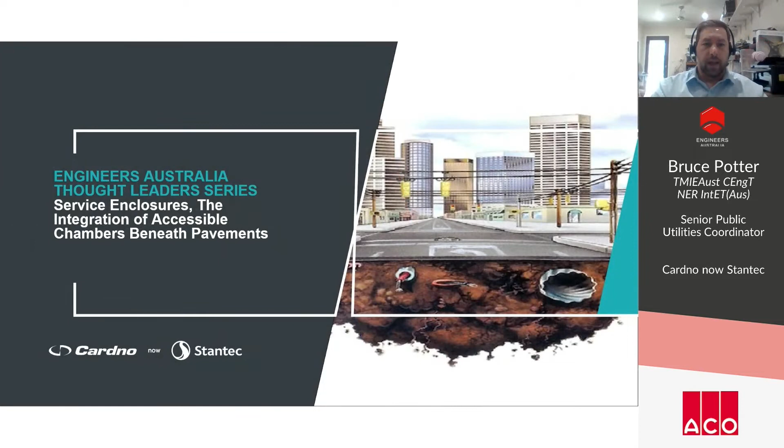Today we're discussing service enclosures. What is a service enclosure? How do we identify where they are, the types of service enclosures, the applications for service enclosures, and some takeaways that you can take away with you.

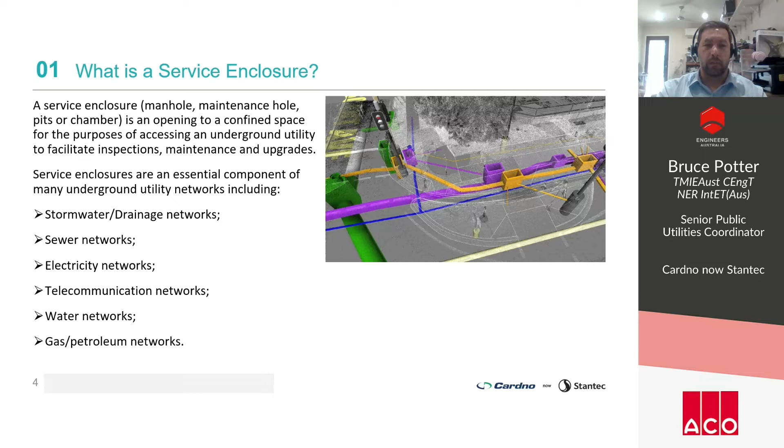So what is a service enclosure and how do we identify where they are? A service enclosure, or a manhole, maintenance hole, pit or chamber, is an opening to a confined space for the purposes of accessing an underground utility to facilitate inspections, maintenance and upgrades. Service enclosures are an essential component of many underground utility networks, including drainage and stormwater networks, sewer networks, electricity networks, telecommunication networks, water networks, gas and petroleum networks.

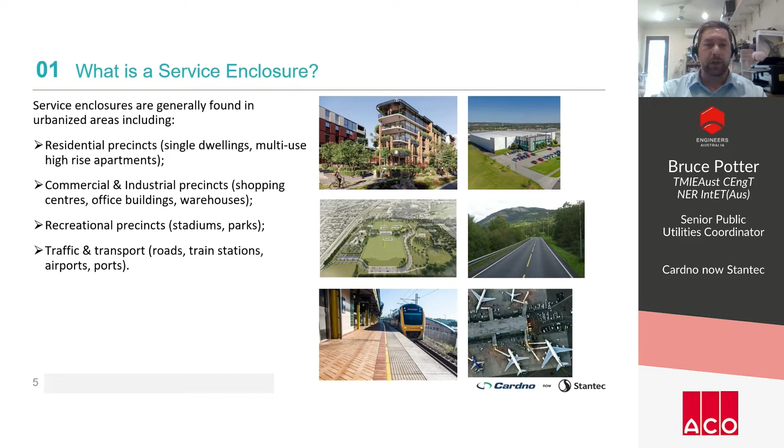Service enclosures are generally found in urbanised areas, including residential precincts, so any subdivisions where you have single and multi-high-rise building apartments, commercial industrial precincts, including shopping centres, shopping malls, office buildings and warehouses, recreational precincts, including stadiums and parks, traffic and transport, including roads, train stations, airports and ports.

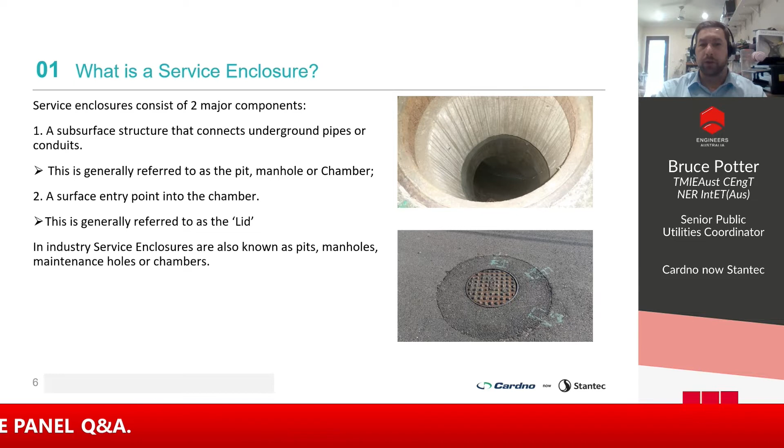Service enclosures consist of two major components: a subsurface structure that connects the underground pipes or conduits, generally referred to as the pit, manhole or chamber, and a surface entry point to the chamber, generally referred to as the lid. In industry, service enclosures are known as pits, manholes, maintenance holes or chambers.

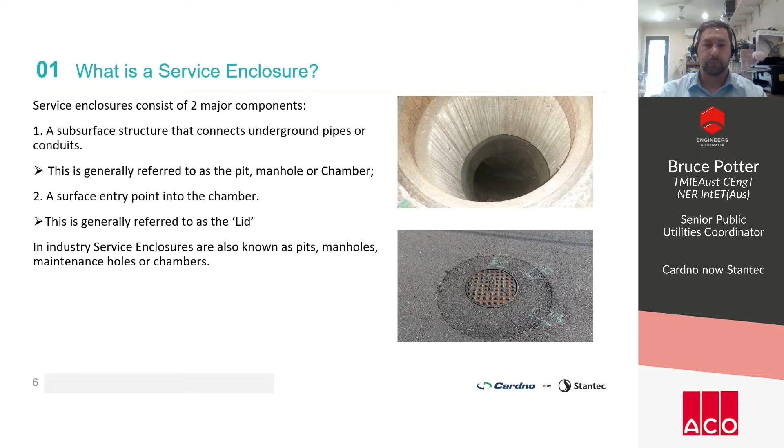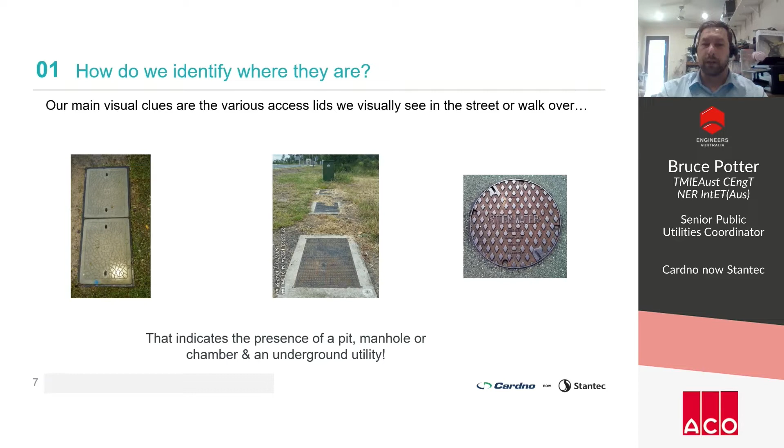So how do I identify where they are? Our main visual clues are the access lids we visually walk over or visually see. On the left-hand side, we have a telecommunications pit that you'd normally see in a residential area. The picture in the middle is a telecommunications pit that would contain large conduits and cables. And the picture on the right is a stormwater manhole that's in the road. This would indicate the presence of an underground utility with the pit lid that you see.

The first step to obtain information about a public utility is to lodge a Before You Dig Australia request. This used to be called Dial Before You Dig Australia, and they've now changed their name to Before You Dig Australia. Or if you are working in an area where there's private assets, such as a private airport, you'd need to contact the relevant organisation.

Before You Dig Australia information is considered Quality D of AS 5488.1 2022 and should only be used as a guide for presence of underground utility. Other sources you can obtain information from may include topographic surveys or via utility locators, which might actually provide photo maps or their own utility surveys.

In engineering design, the topographic survey would normally contain the lids of the existing utilities. These would be labelled to the type of utility asset, such as drainage or sewer or electricity and communications, and assigning this to Quality Level C of AS 5488.1 2022 for a surface feature. This indicates that there is a presence of an underground pit, manhole or chamber with pipes and conduits connected when combined with the Quality Level D information from the Dial Before You Dig or Before You Dig Australia search.

You can obtain more information by opening the pit lid, and that's usually done by the asset owner or an accredited utility locator.

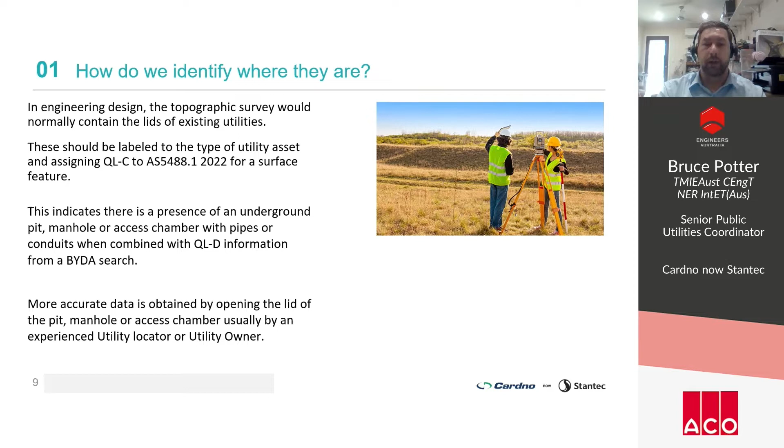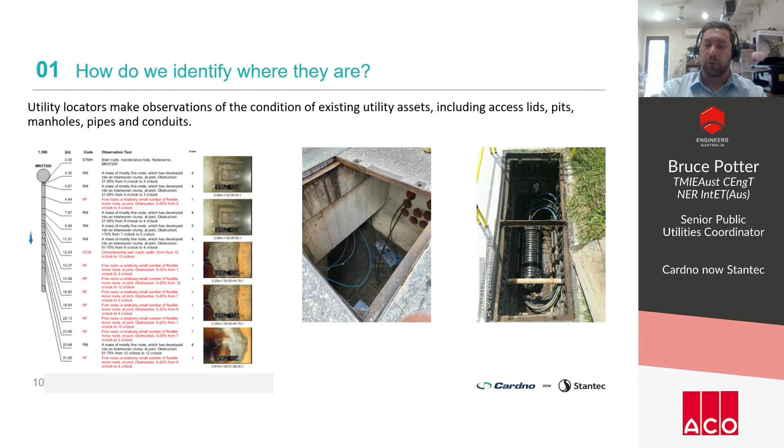Next, we talk about manholes. Manholes are generally associated with stormwater and sewer assets. They are considered non-trafficable, but also trafficable. In the case of non-trafficable, they can be found in footpaths and sidewalk pavements, and pedestrian-centric areas such as shopping malls and shopping centres. The manhole is usually constructed of reinforced concrete, and the lids are usually cast iron or concrete infilled lids, which can be textured to match their surrounding aesthetics. The picture on the right shows an existing sewer manhole lid in an allotment.

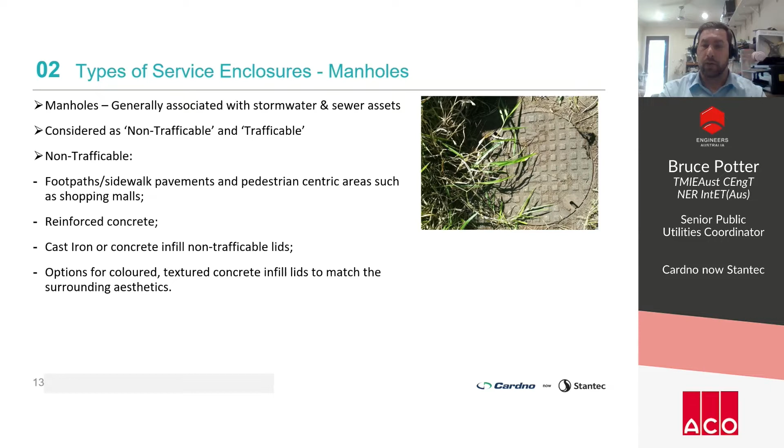Now we move on to manholes in trafficable situations, which are generally found in flexible and rigid pavements such as cycleways, car parks, roads, and airport aprons. Again, they are generally constructed from reinforced concrete, and the lids this time are cast iron or concrete infill lids, but they are trafficable type, so much more heavy duty. There are also options for bolted down lids.

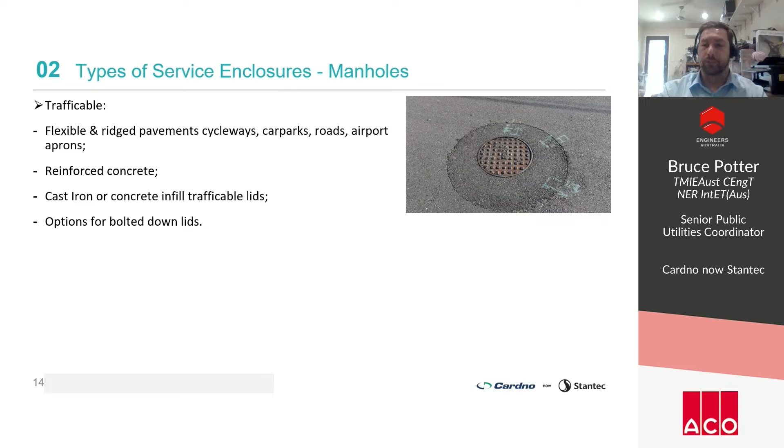Now we move on to chambers. Chambers are generally associated with any asset that contains a surface opening to a larger confined space area containing larger pipes or multiple groups of conduits. They can be considered trafficable or non-trafficable. In the case of non-trafficable, they can be found in footpaths and sidewalk pavements, and pedestrian-centric areas such as shopping malls and shopping centres. They're made of reinforced concrete, and their lids can be cast iron or concrete infill lids. Similar to pits, their lids can be textured to match the surrounding aesthetics. The picture on the top right shows inside of a pit inside a sidewalk in the CBD area, and the picture at the bottom shows a cast iron lid in a footpath area.

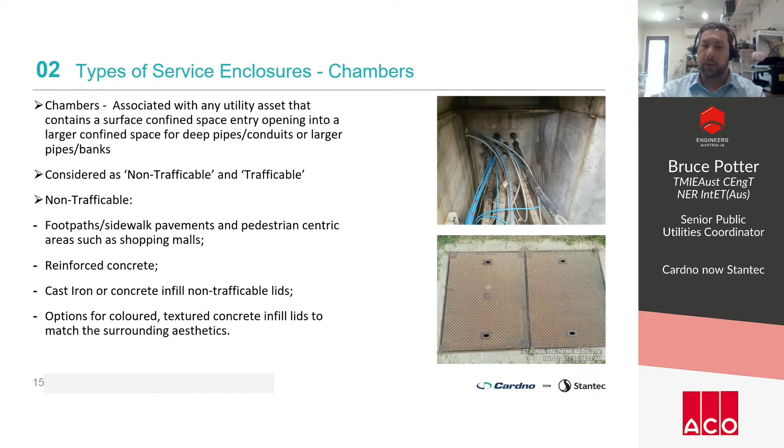Now we move on to chambers in trafficable areas. Again, these are in flexible and rigid pavements such as cycleways, car parks, roads, and airport aprons. They're made of reinforced concrete, and the lids can be cast iron or concrete infill trafficable lids. Again, they can have options for bolt down lids.

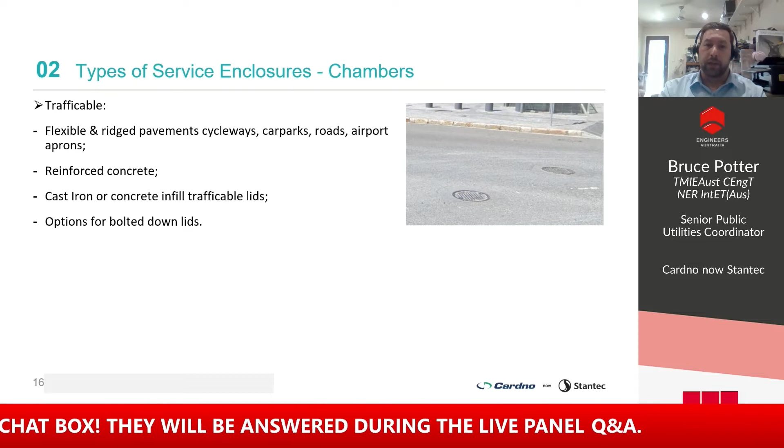Now we move on to the application for service enclosures. Pits, manholes and chambers are in almost every project, including Greenfield projects, defined as any project that lacks constraints by prior works, or Brownfield projects, defined as projects that contain prior works that may impact the design you're currently working on. Both Greenfield and Brownfield projects may contain non-trafficable and trafficable access lids, pits and manholes that require different factors to be considered depending on the applications you are using them for.

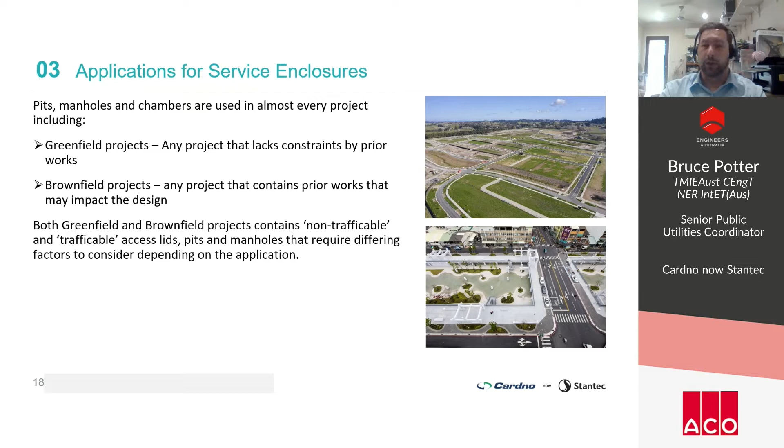So in the case of Greenfield projects, the overall considerations here is the risks are generally lower than Brownfield projects. The design constraints are generally limited to the project coordination and constructability considerations within the project itself. Safety and design risks are generally lower and more manageable. And the durability and maintenance of pits, manholes and access chambers are lower because they are considered as new.

So as you can see there in the picture on the right-hand side, we've got a brand new urban development site there, and contained within that, you'll have your stock standard pits, manholes and chambers associated with that project.

So now we talk about Greenfield projects, non-trafficable. So what to consider for pits, manholes and chambers? Well, they're primarily based on standard corridor widths and verges in road reserves and considered as reticulation. Pits, manholes and chambers and their associated pipes and conduits are generally designed to standard verge depths. The loads on the pits, manholes and chamber depths are considered as light duty under footpath and pedestrian-centric areas.

As discussed before, they are generally unreinforced concrete or hard plastic. And the safety in design considerations for constructability, access and maintenance are considered as standard in line with operations and maintenance. As you can see, the picture on the right-hand side there shows a typical scenario in a verge situation with a reticulated telecommunications asset.

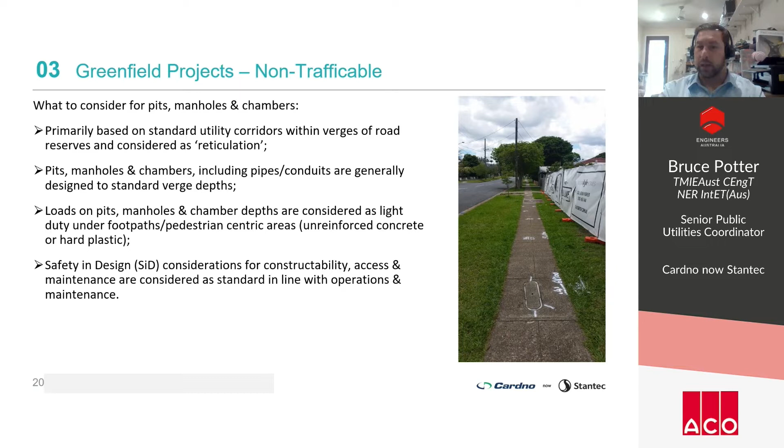So now we move on to Greenfield projects, trafficable. So what to consider for pits, manholes and chambers? Well, they're primarily based on reticulation, but they can also contain trunk utility assets or assets that are unable to be designed in the standard verge corridors. So you may have a situation where you have high voltage electricity that does not fit in the verge that needs to go under the road pavement.

Pits, manholes and chambers, including pipes and their associated conduits, are designed deeper to accommodate the road pavement design. The loads on the pits, manholes and chamber structures are considered as heavy duty, and as discussed before, they are made primarily of reinforced concrete. The loads on the pits, manholes or chamber lids are considered as heavy duty, and again, cast iron is generally what they're made of, or concrete infill lids. The access lids are considered as heavy duty.

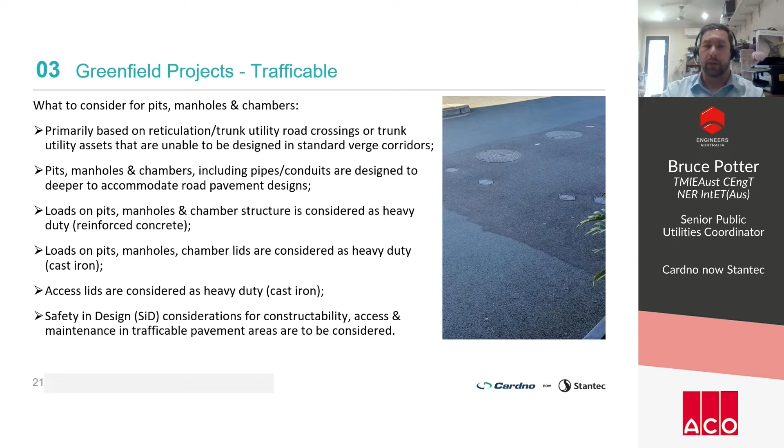Safety in design considerations for constructability and access in trafficable areas are to be considered. So when we're placing these sort of things in the design world, we should be placing them as close as possible to the existing curb line, where we can actually think about maintenance in roads, where we can shut off the road without affecting multiple lanes.

So now we move on to Brownfield projects. So overall considerations, the risks are generally higher due to constraints that may affect the designs. So there's lots of moving parts that sometimes you're aware of and sometimes you're unaware of, or you're obtaining more information about them. It relies on the collation of existing utility data. So in this particular case, you would have to map the existing utilities that are on site to make sure that you are fully aware of what's currently underground.

You would need to identify the existing pits, manholes and chambers to be modified, being raised or lowered against the design levels. So this means that you might have an existing telecommunications pit that may need to be raised to the final surface levels. The pits, manholes and chambers need to be structurally condition assessed to determine if they are fit for purpose. So some of these pits that you may see may actually be degraded. So you will need to actually pull out the entire pit and replace it with a brand new pit. You'll obviously need to obtain approvals from the asset owners.

Safety in design risks are generally higher and may require inputs from multiple sources. And the durability and maintenance risks of pits, manholes and chambers are generally higher because we're generally retrofitting, unless of course we are putting in a brand new asset, in which case it is not as high as retrofitting.

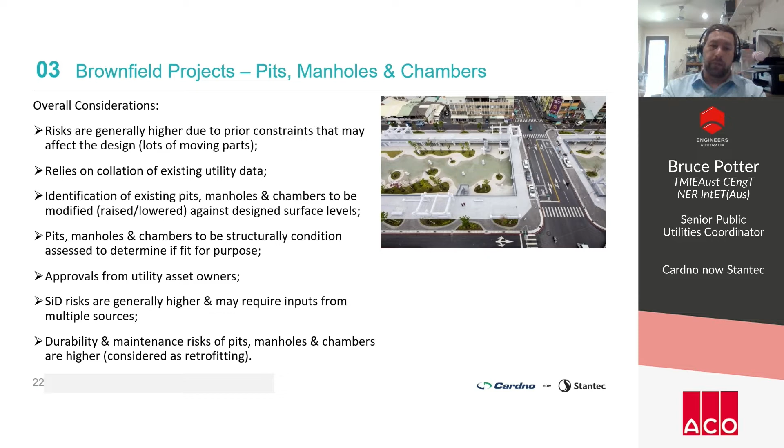So Brownfield projects in a non-trafficable situation. So what to consider for pits, manholes and chambers? Well, they generally adopt the standard corridor widths and depths under road reserves where practical, but are based upon the utility data and new designs. So if you have mapped the existing utility data, and you have a design, you need to understand where you can actually place these new assets.

Structural condition assessment of existing pits, manholes or chambers identified as maintained and modified or raised or lowered to new design levels. The loads on the pits, manholes and chambers are considered as light duty under footpaths and pedestrian-centric areas, and again, unreinforced concrete or hard plastic. Access lids are considered as light duty, so concrete infill or hard plastic.

So now we move on to brownfield projects in a trafficable situation. So what to consider for pits, manholes and chambers? Well, they're primarily based on reticulation and trunk road crossings or trunk utility assets designed deeper under flexible and rigid pavements based upon existing utility data and new designs. So what that means is that unlike a greenfield project, you will need to look at what existing constraints you have with the existing underground utility data and whatever it is that the design is doing.

We'll need to do a structural condition assessment of the existing pit, manhole or chamber, identified as to be maintained and modified, so you may need to raise it or lower it to the new design levels. The loads on the pits, manholes and structure are considered as heavy duty because they're made of reinforced concrete under flexible and rigid pavements based upon existing utility data and new designs. And the access lids are considered as heavy duty cast iron.

Safety in design considerations for constructability, maintenance and trafficable pavement areas are considered as a case-by-case scenario. And again, similar to what happens in greenfield sites when we have trafficable situations, we need to consider the accessibility of these assets, so whoever's maintaining them doesn't need to take out many lanes of traffic in a highway situation, where they're contained in one single lane where we can actually take out a lane and not adversely affect other traffic.

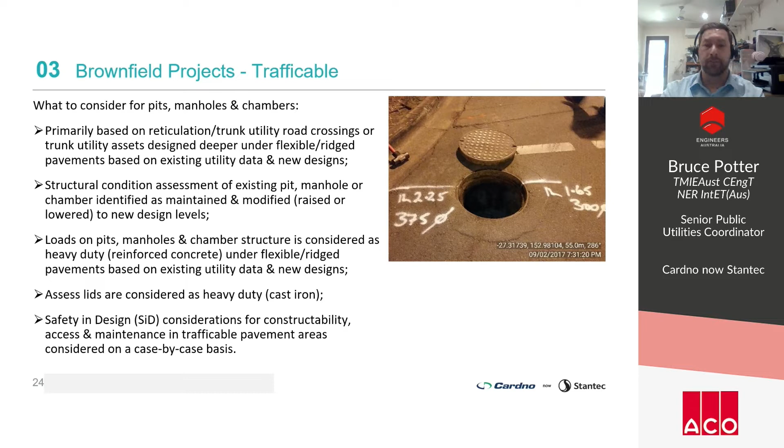So now we come along to the takeaways of all this presentation. So what you should take away from this presentation is the pits, manholes and chambers are absolutely everywhere. We continue to design them in every project that we work on, but there are also many of these assets that are currently existing. Some of them are in good condition, some of them are in not so good condition, and some of them are somewhere in between.

We need to also understand the differences between the pits, manholes and chambers for the various types of utilities and their applications, and the differences between non-trafficable and trafficable pits, manholes and chambers on the various types of pavements. So when you are specifying something for a footpath pavement, or something for a flexible road pavement, or something maybe in an airport's apron, they're all going to have different scenarios to consider.

Pits, manholes and chambers in greenfield projects rely on correct specification depending on the application, and they're basically considered as new assets. The pits, manholes and chambers in brownfield projects rely on condition assessments and are considered as retrofitting. And of course, that's all based upon existing data that we collect.

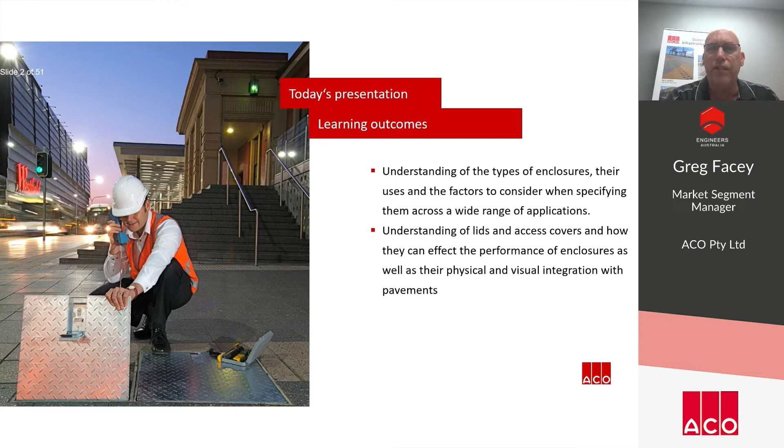Cover and frame systems also provide secure protection to cable enclosures and enable decorative floor finishes to be maintained with minimal interference. Today, we'll discuss the key requirements when selecting service enclosures, cover and frame systems, as it's important to understand the correct enclosure for the application. So in today's presentation, we're looking to achieve an understanding of the types of enclosures, their uses, the factors to consider when specifying them across a wide range of applications, and also an understanding of the lids and access covers and how they can affect the performance of the enclosures as well as their physical and visual integration with the pavements.

Because understanding this is really important in terms of cover durability and pavement life, because incorrect product selection, poor product or incorrect assessment of the site conditions can lead to failure of the system, and failures occur for a wide variety of reasons. However, understanding all the aspects of the enclosure system is critical to long-term performance.

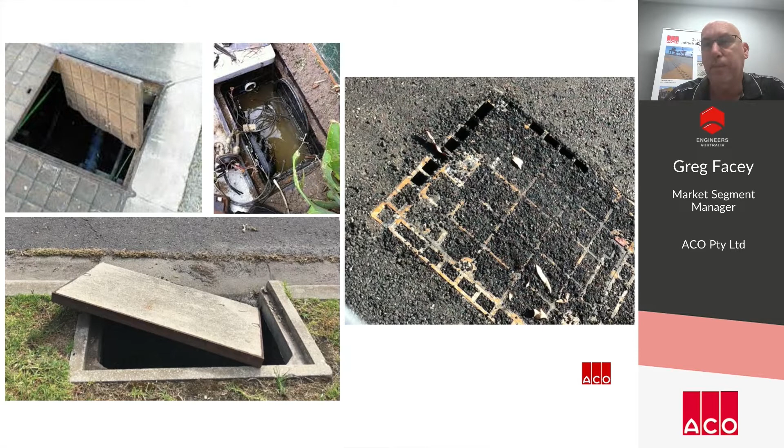So if we consider the types of cable service enclosures, cable pits are positioned on cable routes to provide branching or bending points or to allow access for jointing and maintenance. Common cables routed through cable pits are data communication or fibre optic cables, and also low voltage electrical wiring. Just remember that generally higher voltage cables typically go overhead or extremely deep underground.

In contrast to this, surface cable ducting systems become the cable route themselves and allow for low voltage cables and other utilities to be laid directly along the trafficable pavement. They can be continually accessed through removable covers, and the structure enclosing the services is typically continuous. These are often in the form of either precast sections with smaller widths with covers up to 300 mm, or can also be cast in situ systems for wider width requirements.

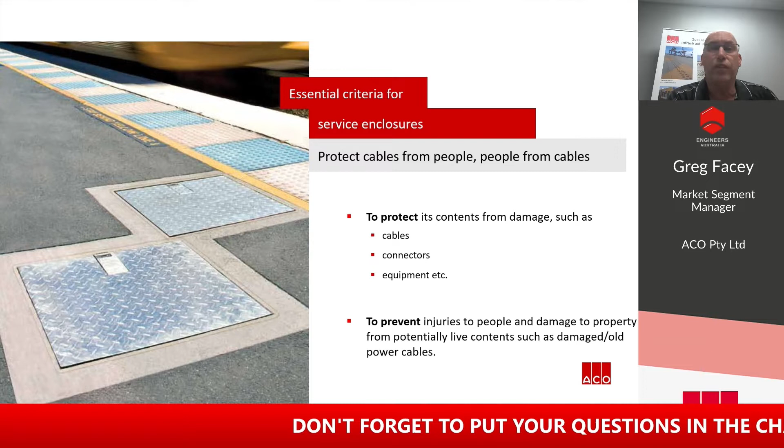A cable enclosure is designed to protect its contents, so its cables, connectors and equipment, against external influences. The structure also needs to act as a shield to prevent its potentially live contents from causing damage or injury to passers-by.

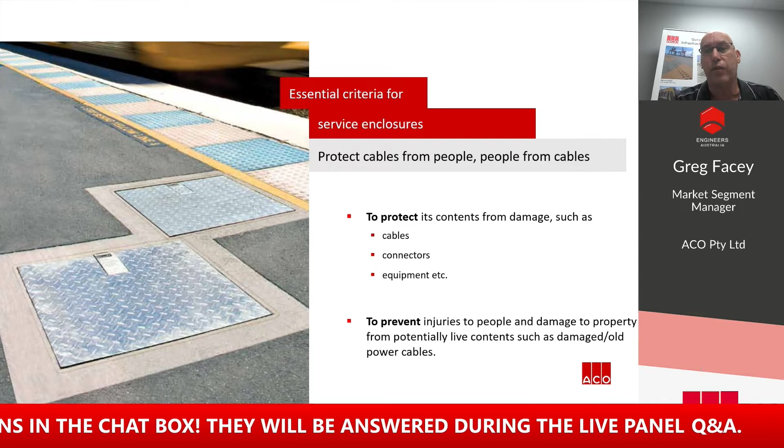Cable pits are commonly positioned where the cable run is required to change direction, and this is because bends in underground conduits are undesirable. Cable pits are also used for drawing, or hauling is another term, of the cables, also called pulling boxes, and they are used for pulling cables into the enclosure using pulling equipment or looping or feeding it into the next enclosure along the length of the cabling system. In each drawing pit, conduits are generally aligned with the opposite walls at the same elevation. AS 3084 stipulates strict requirements for cable pulling so cables aren't damaged during these operations.

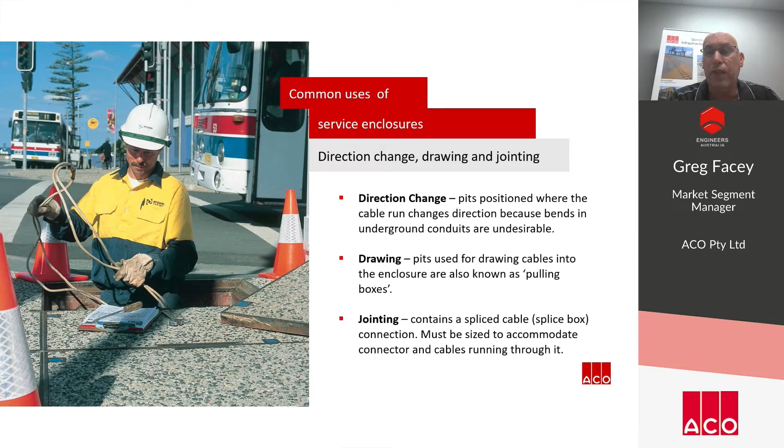Jointing pits, which are also called splice boxes, are intended for enclosing a spliced cable connection. These pits contain waterproof cable joints and are generally placed along straight sections of the cable route. These cable pits must be correctly sized to accommodate the size of the connector and also the cables running through it.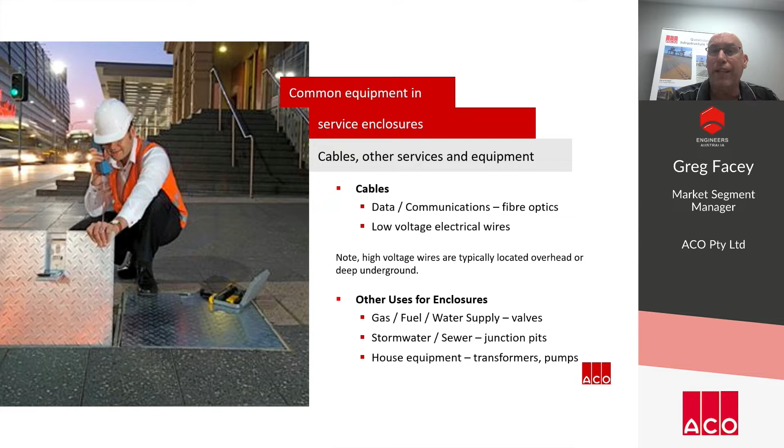Some common equipment in service enclosures are cables, so data and communication, fibre optics, low voltage electrical wires, and they're used not just for electrical cabling, but also for other uses, as in gas, fuel and water supply and valves, housing stormwater and sewer junction pits, and also housing equipment, i.e. transformers and pumps. Locating services below ground enhances the appearance and also improves access by service personnel.

So there's four key factors that need to be considered when selecting service enclosure systems. Choosing the right enclosure for the right application, particularly during the planning and design stage, is essential to prevent both problems and product failures in the future. We need to consider the size of the enclosure to ensure the utility asset is housed appropriately, the location and all intended loads in each of its locations.

The type of traffic loading will also play a significant part in selecting the correct product. For example, a light vehicle versus a heavy vehicle or forklifts will exert different loads on the cable enclosure. Durability of the materials, both of the enclosure and the cover, and ground conditions and location also play a significant part in the durability of the enclosure. We need to consider the safety and security of the enclosure, what level of security is required, and also the user and public safety.

Considering the site and user requirements with the installation and maintenance of the enclosure, how will this enclosure be installed? Ultimately, a contractor will pick up the drawings and need to carry out the installation. So it needs to be easy to install, or is it a time-consuming enclosure which is going to add more cost? So choosing the correct enclosure can have a direct impact on costs. Ultimately, the asset holder undertakes the maintenance in most cases. So how is the enclosure or the system going to be maintained in an efficient and safe manner?

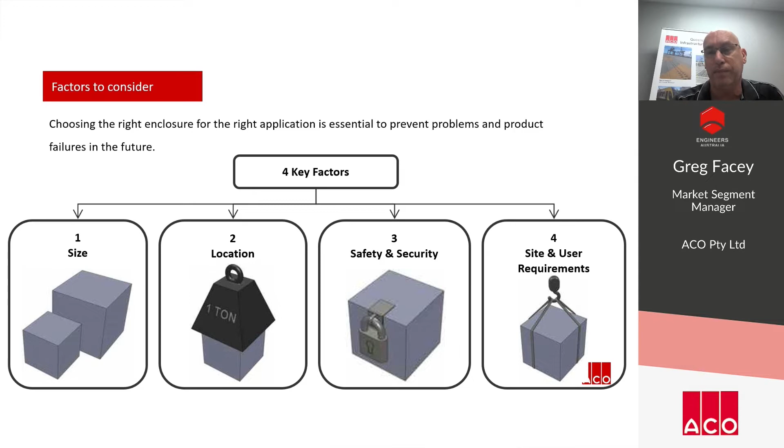So choosing the correct enclosure size will depend on the following: the purpose of the enclosure, the minimum bending radius of the cables, and refer to the manufacturer's cable recommendation. Minimum depth to cables, so you need to refer to those standards, and is segregation of the cables required? For example, it may be low voltage electrical or maybe communications. And will the pit be used for storage? Most cable pits are narrower at the base for ease of manufacturing, so you need to make sure you consider the clear opening of the cable enclosure and the pit, and also its minimum dimensions.

We also need to consider the location and particularly the traffic and loading, because there is no Australian standard that applies to service pits. So we need to consider the anticipated traffic scenario over each of the enclosures. So is there no anticipated traffic? Is there some accidental, or will it be deliberately traversed by vehicles? The wheel type and the loadings during the construction and during the service.

Often we've seen pits that may be utilised in a light duty application, but have been traversed by trucks and vehicles during the construction phase, which damages the pit. So all those phases during the construction phase need to be considered, and also importantly, during its service life. A single cable route can pass through a number of different environments, and every service pit along the cable route may be exposed to different scenarios.

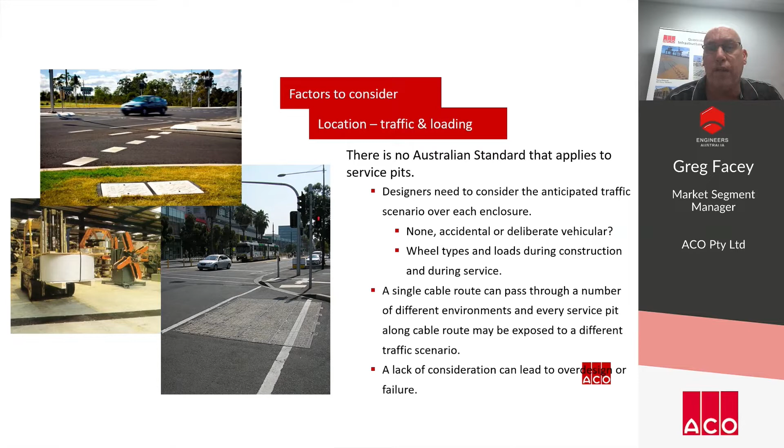So what they're saying is in one location on the cable route, it might only be a light duty application because there's no vehicles traversing it, but that may not be the case throughout the entirety of the cable run. So we don't want to be specifying the covers or the pit for light duty applications when we know it's going to be traversed further down the cable route with trucks. Alternatively, we don't want everything to be extra heavy duty when it's not going to be traversed necessarily, because that's adding more cost. And a lack of consideration can lead to over-design, causing more cost, or can also lead to failure.

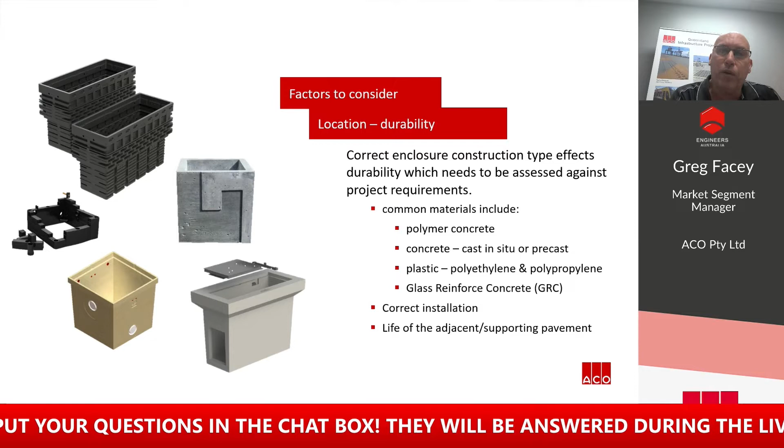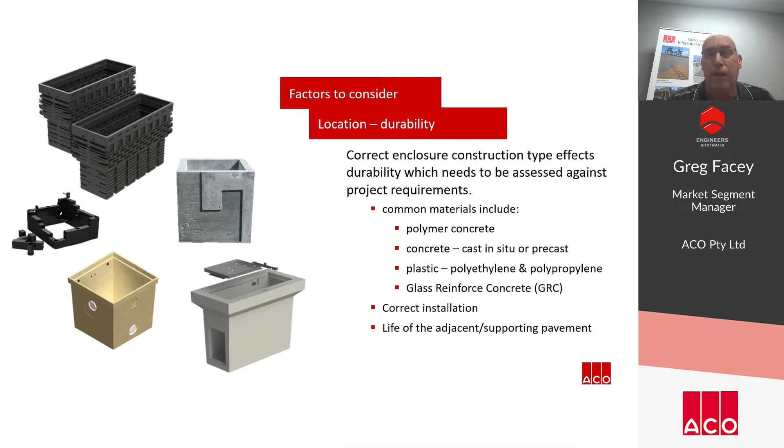The correct enclosure construction type affects the durability, which needs to be assessed during the project against the project requirements. Some common materials for the cable enclosure are polymer concrete; concrete, cast in situ or precast, so essentially a Portland sand and cement with reinforcing; plastic, in the form of either polypropylene or polyethylene; and GRC, or glass reinforced concrete. We also need to consider the correct installation of the pit. So the pit might be fit for purpose, but it's really important that it's installed correctly. And we also need to consider the life of the adjacent and supporting pavement, which can have a direct impact on the cable enclosure itself.

So if we look at some of the different materials and how they perform, you can see here briefly, polymer concrete has a lot of advantages as a construction material on surface, and certainly for a cable enclosure in the form of a pit. Lightweight, low porosity, excellent insulator, excellent chemical resistance, non-flammable, high resistance to weathering, and low coefficient of expansion and contraction compared to that with plastic.

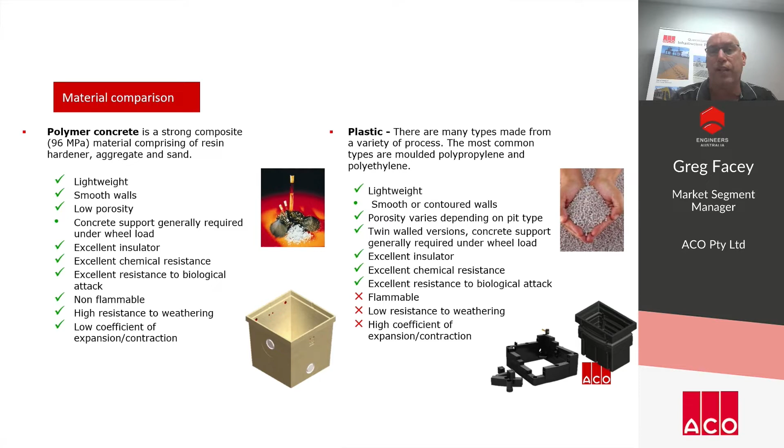And plastic does have advantages: very light, easy to use, easy to create penetrations. There have been some advancements in the industry where typically plastic pits were always what we would call a light-duty single-walled pit. However, there are other pits available now in the form of a twin wall, which can be utilised in heavier duty applications. They are an excellent insulator and have high chemical resistance, but they are flammable. They do have low resistance to weathering, and certainly single wall pits have a high coefficient of expansion and contraction, which means that the actual material can move in and out with different levels of heat during the day.

If we look also at concrete and GRC, one of the main things with concrete is we know it's heavy, so does it need lifting equipment to move it around? It does have moderately smooth walls and average porosity. It does require steel reinforcing to support it, but generally not required under a wheel load. It does have poor chemical resistance and poor resistance to biological attacks, but it does have a lower coefficient of expansion and contraction.

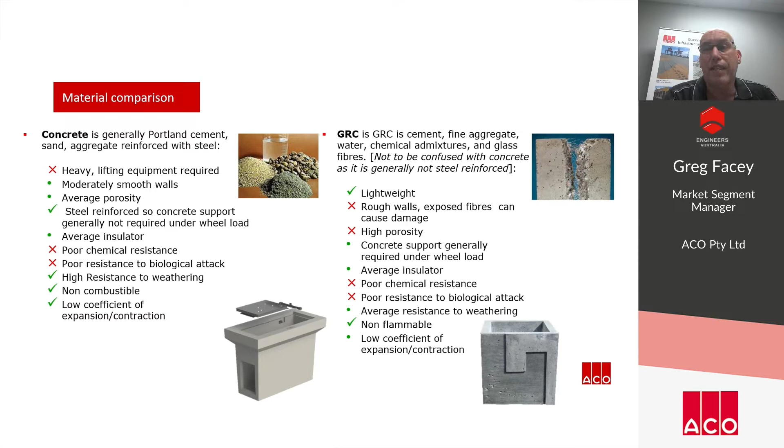Look, GRC, if you're not familiar with GRC, it's a fine aggregate of water and chemical admixtures and glass fibres, so not to be confused with concrete because it's generally not reinforced. It does have an advantage that it's lightweight, but it does have rough walls, which is a disadvantage. It does have high porosity, which is a disadvantage, poor chemical resistance and poor resistance to biological attacks. It is non-flammable, but it is worth noting, particularly with GRC in aggressive environments, it is prone to deterioration, particularly with alkaline soils. So therefore, GRC pits require regular maintenance and in some cases are susceptible to early failure.

And adverse ground conditions may require an increase in these dimensions of the pit and or the addition of reinforcement. And if in doubt, seek engineering advice, because soils can apply lateral pressure on the structures just in the form of its own weight and any surface live loads adjacent to it. And we also need to consider any expansive soils and their properties. And as I mentioned, they can result in lateral earth pressure exerted on the pit wall itself and can lead to early failure.

The location of where the service enclosure is going to be installed is paramount, and understanding what pits are suitable for what application is also really important. So in a landscape environment, light duty loading on a pit structure allows the use of a flexible pit. So we're talking about a single walled, or could be a twin walled plastic pit in this application, but generally single walled. Materials range from fiberglass, so resin and glass mat structure pits, or plastic in the form of rotational or injection moulding. And again, the advantage is they're light, robust and easy to use.

If we move on to and consider solid pavements, so these are pavements subject to vehicular and pedestrian traffic, a rigid pit is recommended. So a rigid pit in the form of either a concrete pit or a polymer concrete pit, so non-flexible walls. And these are in the form, as I said, FRC, so either in a precast fibre reinforced product or Portland cement concrete with steel reinforcement. Can also be cast in situ, so these are boxed up and poured on site, and polymer concrete in the form of precast resin composite material. The advantages, they're strong, rigid and they're versatile.

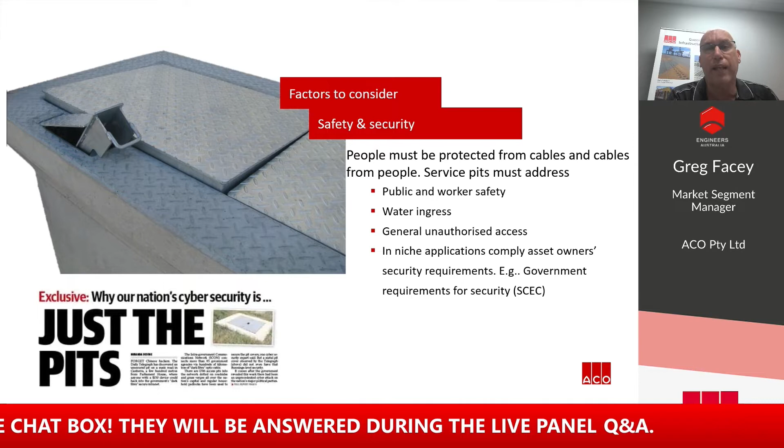And we need to consider the safety and security requirements of the enclosure, because we see heavier security forces in our daily lives and events, and it's not hard to notice the sharp increase in supervision as we go about our daily lives. And sadly, some of the destruction stemming from divisive political, religious and ideological beliefs continues to tick over in the world, unfortunately. But now more than ever, the importance of national security to keep our country as safe and as secure as possible has never been more prevalent. Why do we need to protect ourselves? We need to withstand the disruptions to ensure the safety and well-being of all our residents.

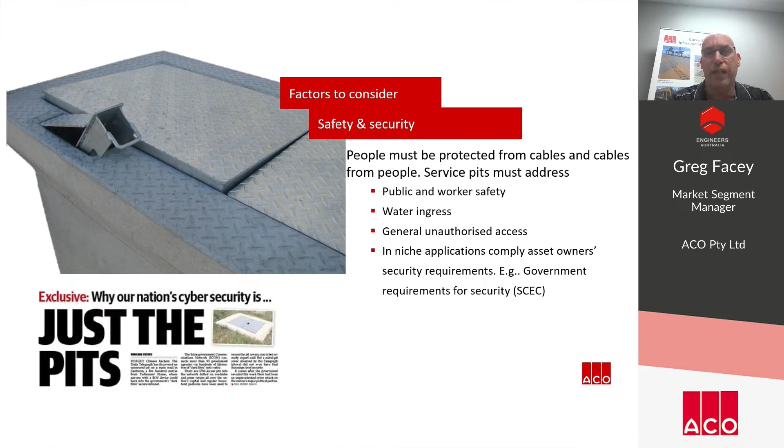We seek, as asset holders and designers, to secure our cyber security systems, and also there are processes in place to protect our national data. To reduce the risk, we adopt a critical resilience approach to the integrity and reliability of our cable infrastructure in the form of high security pits. Therefore, we need to consider all the requirements and standards when selecting the enclosure.

And once an appropriate location for a cable enclosure is determined and the conduit installed, preparations can be made for digging and enclosure installation. If you need to remove a full wall of the pit to install more conduits, you probably need to look to go to a larger pit to retain a portion of the wall. And designers and contractors must observe the regulations and codes of practice legislated by the Electrical Safety Act and refer to manufacturers' standard installation drawings for guidance.

The correct pit type ensures long service life. So we look at the different types of systems: GRC, FRC and polymer concrete. These are utilised for small to medium enclosures, generally off-the-shelf items, installed with either concrete, mortar collar or encasement if they're used under some trafficable loads.

With single wall plastic pits for small to medium applications, they are also off the shelf. They do require concrete mortar and collaring and encasement if used under vehicular traffic. When I say vehicular traffic, this would be only very light duty applications, i.e. a footpath, or a landscaped area that might be traversed by a vehicle or mower.

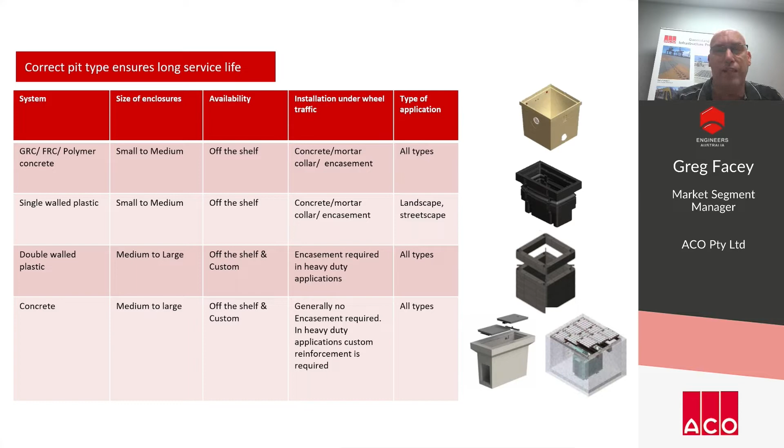So some of the advancements by manufacturers was to remove that bar to a barless application, which removes that bar completely and takes away that risk. Because we want to reduce electrocution and also improve the slip resistance, metal components within the enclosure should be kept away from the electrical cables, and absence of locking bars is the best solution here. If required, pits should be connected to an earthing structure of a building or construction via earthing strap by the eye.

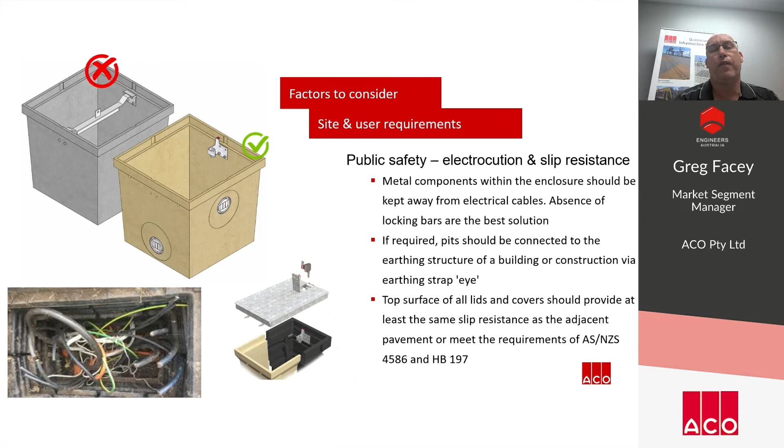The top surface of all lids and covers should provide at least the same slip resistance as the adjacent pavement or meet the requirements of AS/NZS 4586 and HB 197. We don't want the cover to have a higher slip resistance than the adjacent pavement because it can have a mismatched grip level. So where possible, we want to try and have the slip resistance of the cover as close as possible to the adjacent and surrounding pavement.

We do need to consider the site and user requirements, importantly worker safety and any foreign materials and the lifting of the covers. Ingress of foreign matter needs to be considered because excessive ingress may make the service enclosures hazardous, and we require a degree of protection against objects like needles and fingers, etc. That's expressed as an IP rating to AS 60529.

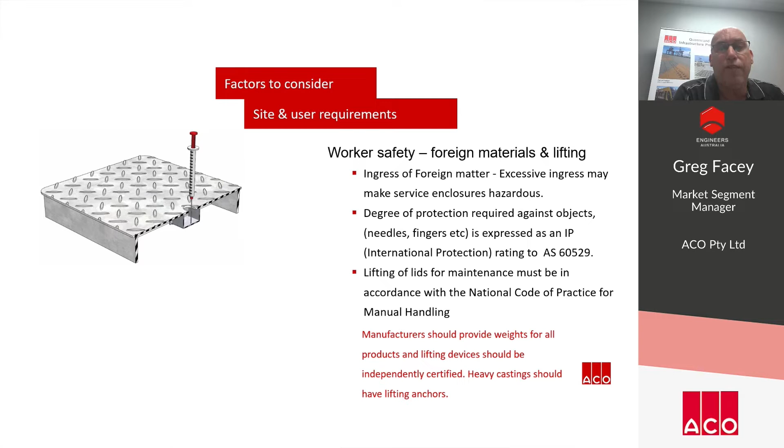The lifting of lids for maintenance must be in accordance with the National Code of Practice for Manual Handling. Manufacturers should be able to provide the weights for all products and lifting devices be independently certified. Heavy castings should have lifting anchors as well to provide ease of lifting.

If we take a look at the water resistance requirement, service enclosures are not designed to be waterproof. However, there is a reasonable degree of weather resistance that can be achieved by the sealing of covers, by either capping and lifting holes each time a cover is removed for servicing. Entry holes for the conduit should be capable of being sealed to prevent siltation. Pit drainage is recommended, particularly for pits positioned at sag points. If a higher level of water tightness is required, and often we get asked this, a ductile iron cover can be utilised, sealed with grease would be the next option, and we'll explore those covers shortly.

We also look at the cable management within the enclosure. Segregation is not uncommon, particularly on public transport applications where different systems must be segregated, i.e. you could have CCTV cables, power and hearing loops.

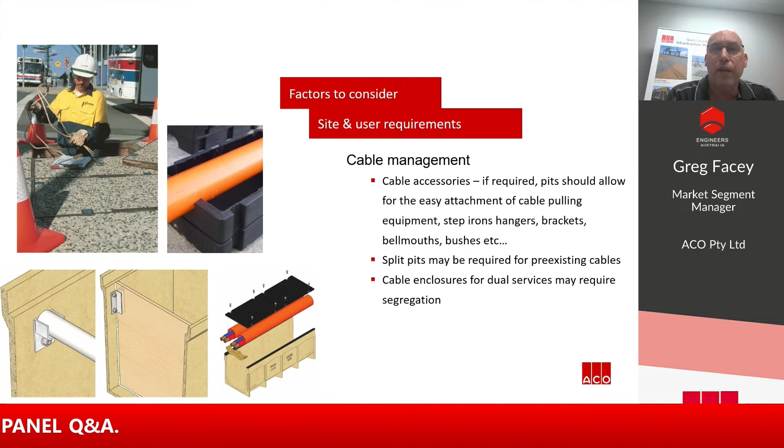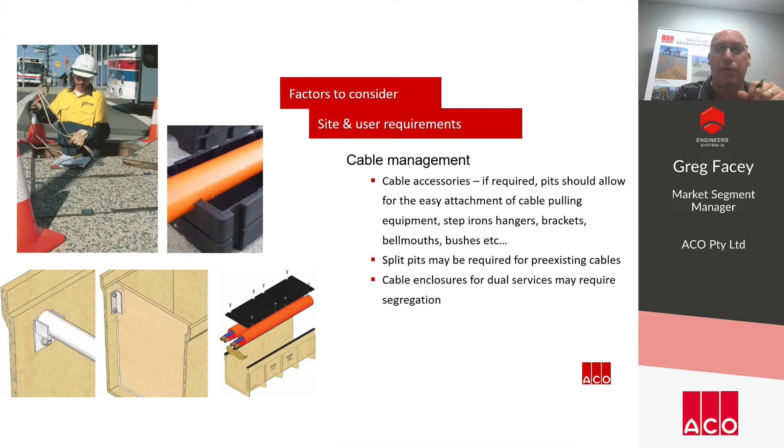If we consider any cable accessories, if required, pits should also allow for easy attachment of cable pulling equipment, step irons, hangers and brackets, bellmouths and bushes, etc. Split pits may be required for pre-existing cables, so these are pits that can be installed within an existing cable route and over and around the cable. And cable enclosures for dual services, as I mentioned, may require segregation.

Here's a good case study of Pat Rafter Arena, where they used a cable ducting system with removable covers. They utilised this system because they wanted to run TV cables where they were doing filming at the various courts. So they remove the covers, put the cable in, and pull it through. Where they might be filming, they'll remove the cover, barricade it, have an isolated area, and then when finished, pull the cables back through and put the cover back on. That was a really ingenious way of using a cable ducting system, exactly what it's intended for.

Importantly, we need to consider any load standards, but there is no Australian standard that applies to service pits. That's because AS 3996 governs only the access covers and lids, which bear direct live loads on top of the enclosure. So there are requirements—we need to consider the load classification. Compared to AS 3996, the deflection criteria have increased from 210 kilonewtons to 240 kilonewtons. We also need to consider the durability of the service enclosure and the water tightness. A manufacturer should be able to provide independent certified test certificates.

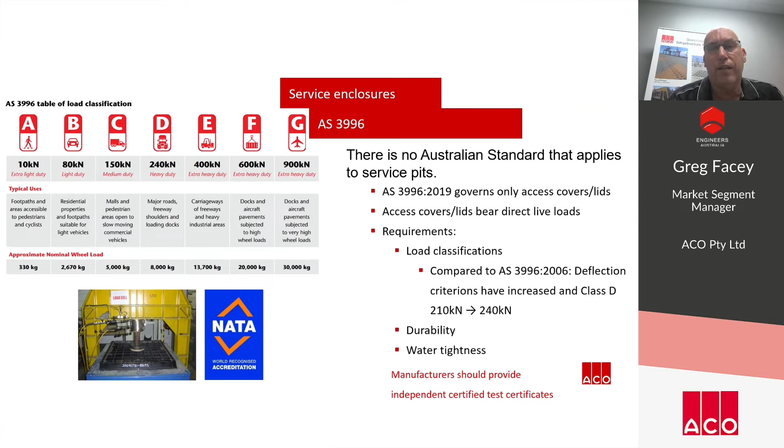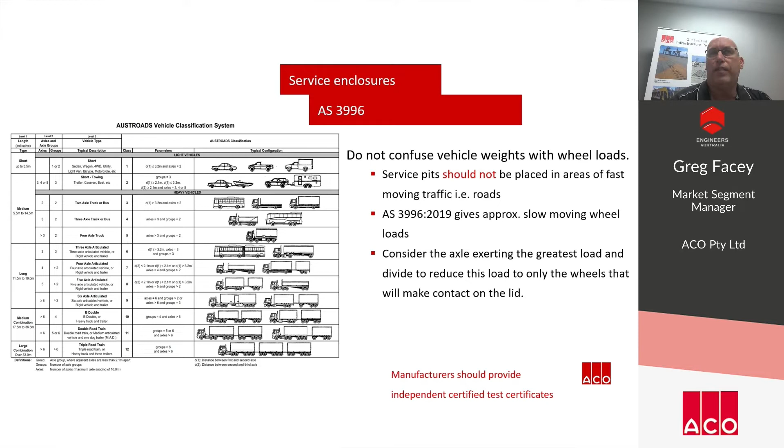It's easy to confuse vehicle weights with wheel loads, and it's a question that gets asked often. If I'm driving a truck over a service enclosure, I need extra heavy duty, or need it to be class G, for example. But it's important that we don't confuse vehicle weights with wheel loads, and service pits should not be placed in areas of fast-moving traffic, i.e. roads. AS 3996 gives an approximate slow-moving wheel load, so that's what we need to consider—the single wheel load that's going to be applied to the service enclosure and cover. Consider the axle exerting the greatest load and divide to reduce this load to only the wheels that will make contact with the lid. This makes sure it's the correct cover for the wheel load, and also reduces the chances of the cover being overspecified.

If we look at the different cover and lid types, lids have either a solid top configuration and fit directly into the service enclosure structure. Access covers comprise a separate cover and frame system installed integrally into the pavement or slab. They do not sit directly on top of the pit—they are fully supported by concrete, which you'll see in the middle image. Often we get asked, and I have seen covers and frames placed directly on top of the pit and then concrete poured around it. That is incorrect. The cover and frame must be fully supported and independent of the pit.

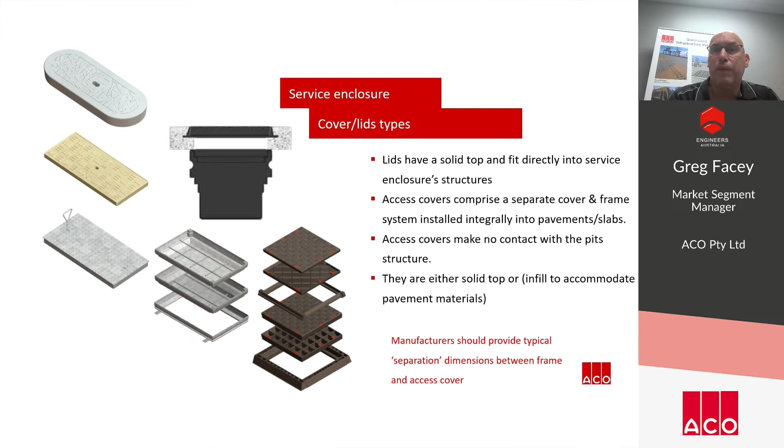Cover and frame systems have an advantage because they can either be a solid top or an infill cover to accommodate the pavement material, so they can blend in and harmonise with the surrounding pavement. If you're using standard lids, ensure that the top of the pit is also level with the finished pavement. If access covers are used, the top of the pit must be set down beneath the pavement level.

Depending on the installation, certain user requirements are considered critical to the asset owner or maintenance crew. We need to look at the access frequency—how often it's going to be accessed. Is there a requirement for protection against foreign objects, slip resistance, what's the aesthetic requirement? Does the enclosure require any identification, i.e. electrical, communications, etc.? And what is the security level?

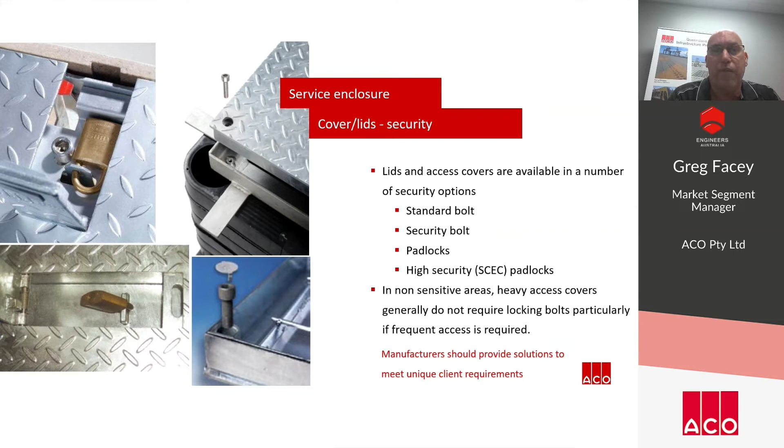Lids and access covers are available in a number of security options in the form of either a standard bolt, a security bolt, padlocks, or high security padlocks. In non-sensitive areas, heavy access covers generally do not require locking bolts, particularly if frequent access is required, just due to the nature of the weight of the cover itself. But manufacturers should provide solutions to meet unique client requirements.

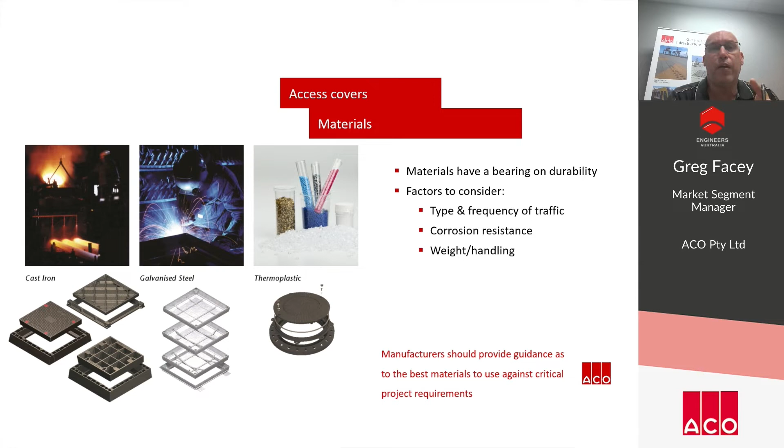So we have a look at access covers and their materials. Some of the factors to consider are the type and frequency of traffic, because that'll determine the cover type and material. Is there a corrosion resistance requirement, and also the weight and handling of the cover itself.

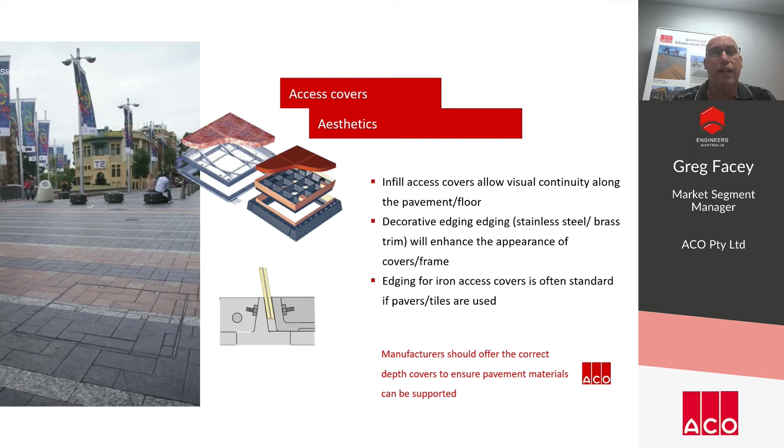We also need to consider the aesthetics of where the enclosure is placed in the pavement, and whether it needs to harmonise and blend in with the surrounding pavement. That's the advantage of infill access covers, because they allow visual continuity along the pavement or floor. Decorative edging in stainless steel or brass trims will enhance the appearance of the cover and frame, and edging for iron access covers is often standard if pavers or tiles are being used.

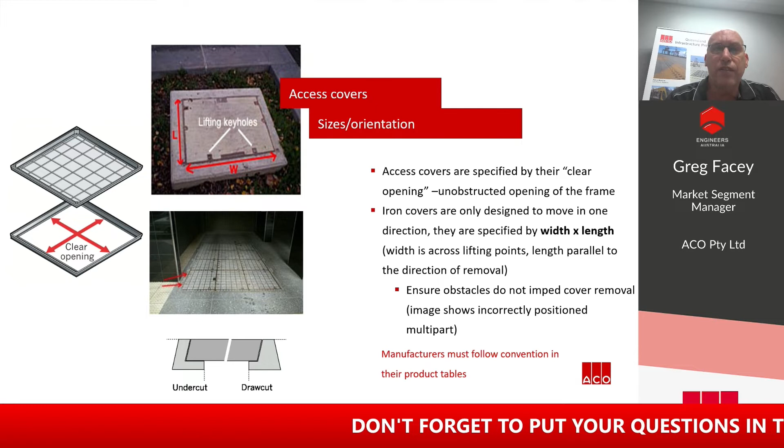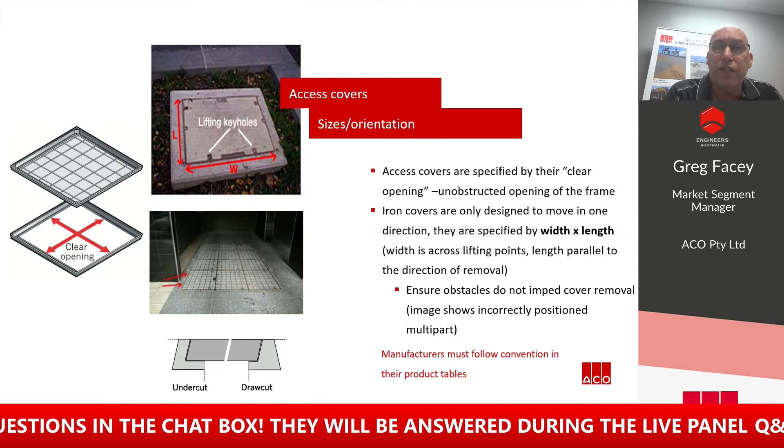Looking at the size and orientation, access covers are specified by their clear opening, not the overall dimension - the unobstructed clear opening of the frame. Iron covers are only designed to move in one direction, and they're specified by width and length: the width across lifting points, and the length parallel to the direction of removal. We also need to ensure obstacles do not impede cover removal.

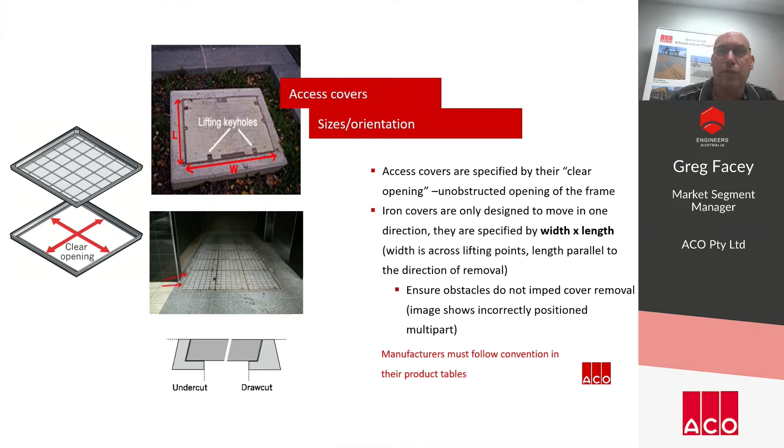This image is a really good example showing a cover that was incorrectly installed. This multi-part cover was installed in the wrong direction - they didn't understand the removal direction, and the covers can only be removed up against the wall, in the direction of the wall. During installation it needed to be turned around so the covers could be moved away from the wall. These little things are really important during the construction phase.

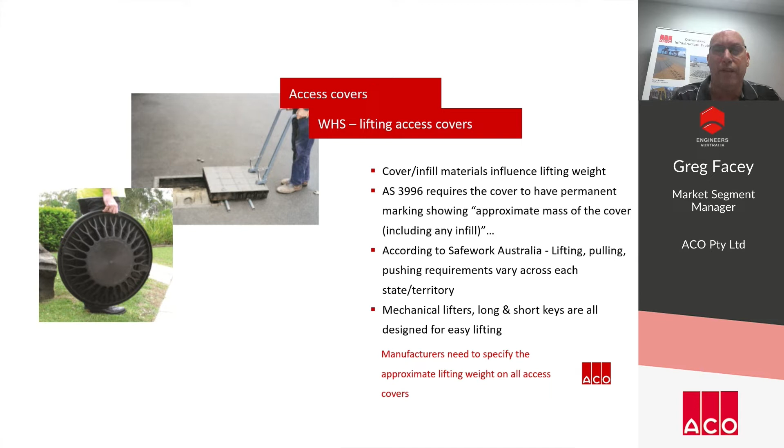We need to consider workplace health and safety and the lifting of access covers. Cover and infill materials influence the lifting weight, so AS3996 requires the cover to have permanent markings showing the approximate mass, including any infill. According to Safe Work Australia, lifting, pulling and pushing requirements vary across states and territories. Mechanical lifters, in the form of long or short keys, are designed for easy lifting, providing more leverage for particularly heavy iron infill covers. Manufacturers need to specify the approximate lifting weight on all access covers.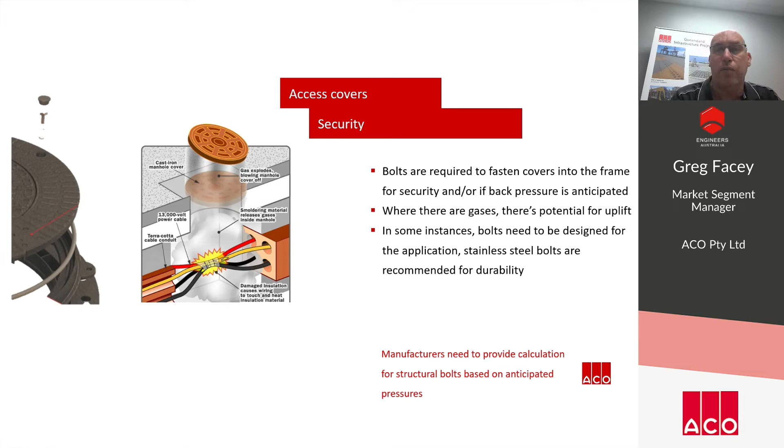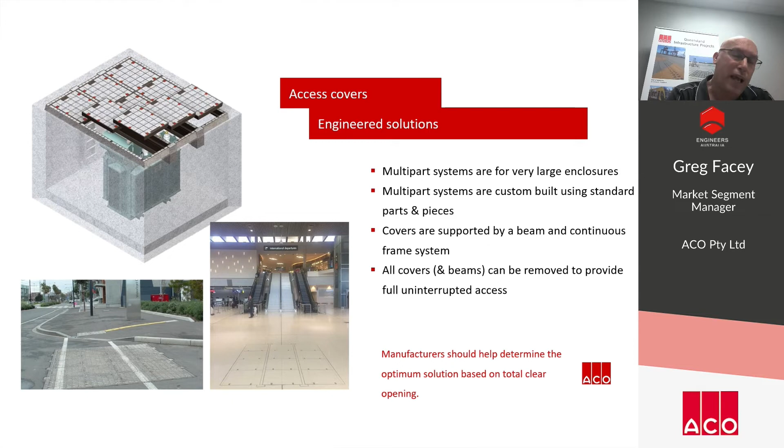Outside of standard or off-the-shelf access covers and cable enclosures in the form of pits, there are other engineered solutions - multi-part systems for very large enclosures. These are custom built using standard parts and pieces. Covers are supported by a beam and continuous frame system, and all covers and beams can be removed to provide full, uninterrupted, clear access to the cables or transformers below.

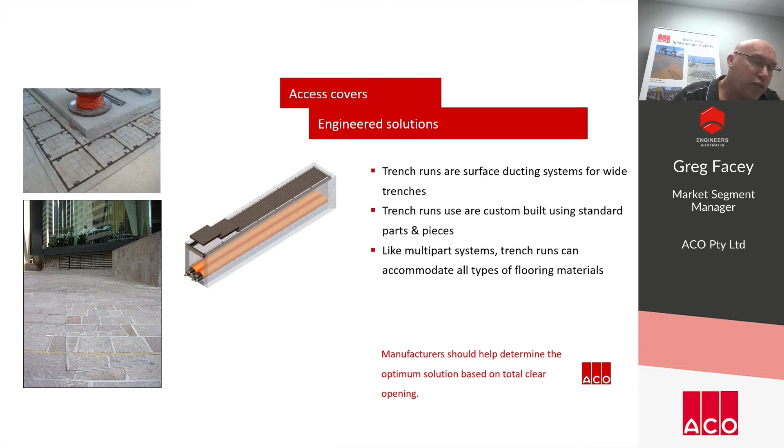Trench runs are surface ducting systems for wide trenches. These are cast on site - the trench itself is cast on site and the covers are supplied by manufacturers. Trench runs are custom built using standard parts and pieces, and like multi-part systems, they can accommodate all types of flooring materials, either as a solid top cover or an infill cover, as shown in the bottom left image, to blend into the surrounding pavement.

Considering weatherproofing on multi-part covers, AS3996 does not govern large access cover systems, purely due to the number of removable components, including the beams and individual covers. Multi-part covers, by their very design, cannot be made watertight. Multi-part cover systems are suitable for applications requiring general weather resistance on well-drained enclosures.

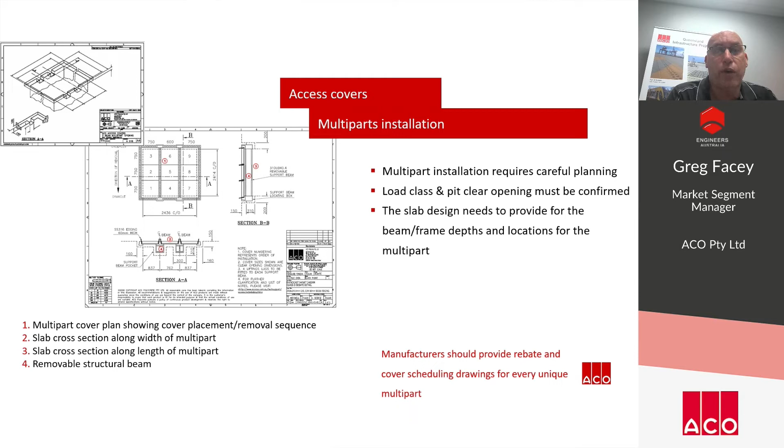It's really important that multi-part systems are installed correctly, and they do require careful planning. The load class and pit clear opening must be confirmed, and the slab design needs to provide for the beam, the frame depths, and the locations for the multi-part system. Manufacturers should be able to provide rebate and cover schedule drawings for every unique multi-part system.

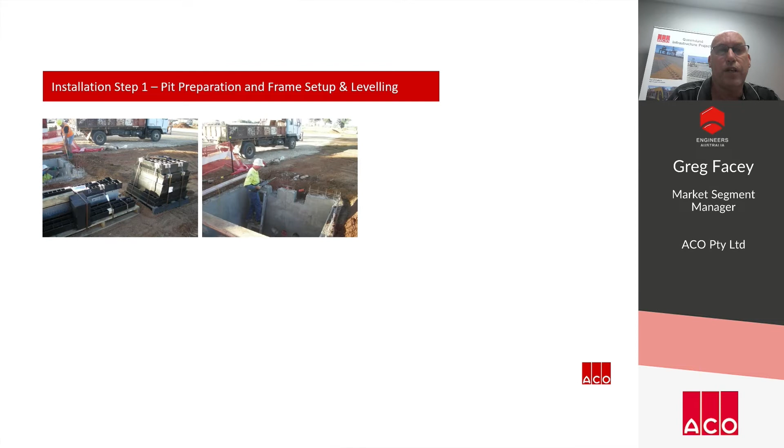So what I'm going to show you here is just a brief typical installation of a multi-part system. So you can see here where the parts and pieces have been delivered on site in the form of the frames and the covers. Then the pit is formed to the rebate details, and then the contractor will start to set out the frames, the wall boxes, and level the frames out. Then start to install the beams.

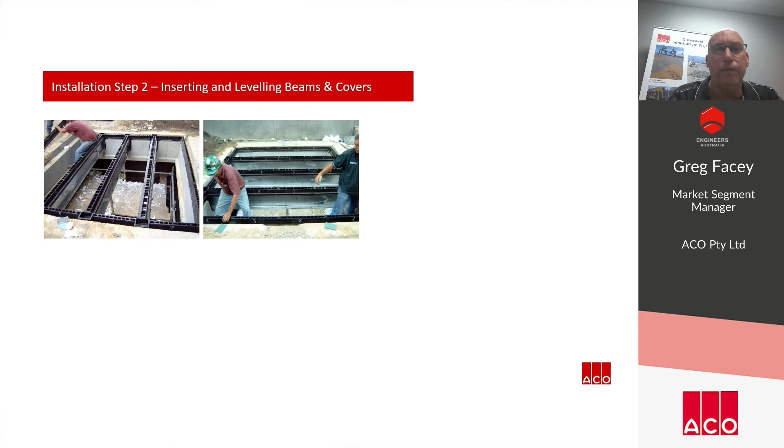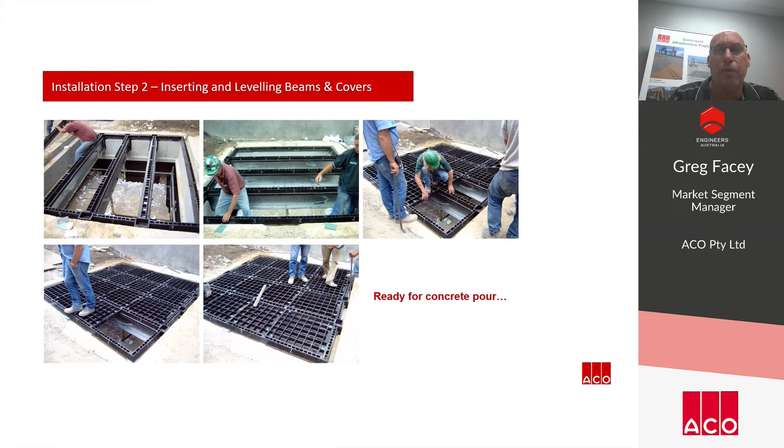Then they'll set up the internal formwork to ensure that the frame will be fully supported after the concrete pour. And then start to place all the covers in place and make sure all the covers are level and are not rocking before the concrete pour. And they'll replace all the dust caps, so there's no holes within the cover system itself, and simultaneously fill the covers and also the rebate gap.

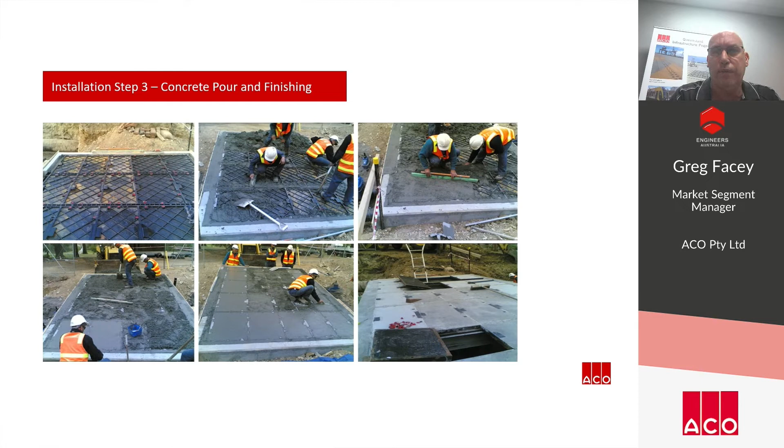So this is a gap between the frame and also the precast or the cast in situ pit, and also all the cellular frames as well. And they'll screed off any excess concrete and wait for it to cure. So as you can see, there's a fair bit of planning and consideration that needs to be considered during the installation of multi-part access covers.

And here is a really good example of a multi-part access cover system and its use. And whilst we talk about cover and frame systems, and ideally we think of electrical cables, this is a really good example of a cable enclosure that wasn't used for cables. So this is Shell Aviation at Brisbane Airport. The fuel pipeline installation needed to comply with some of the stringent safety requirements, and shut-off valves are strategically located along the pipeline. And one of the shut-off valves was actually located airside between both terminals, but was regularly trafficked by taxiing aircraft.

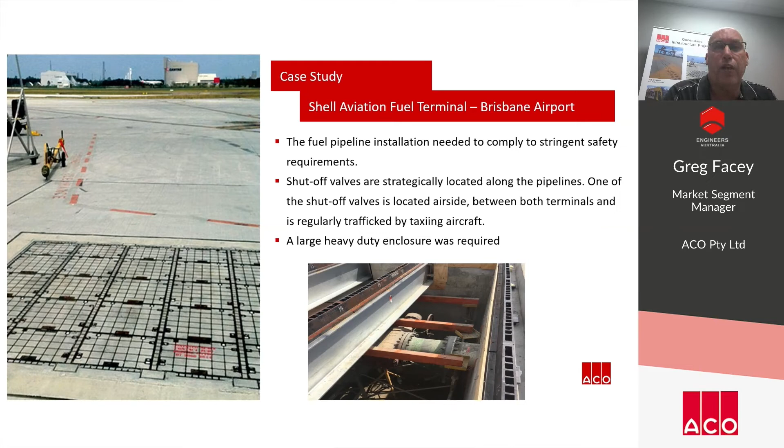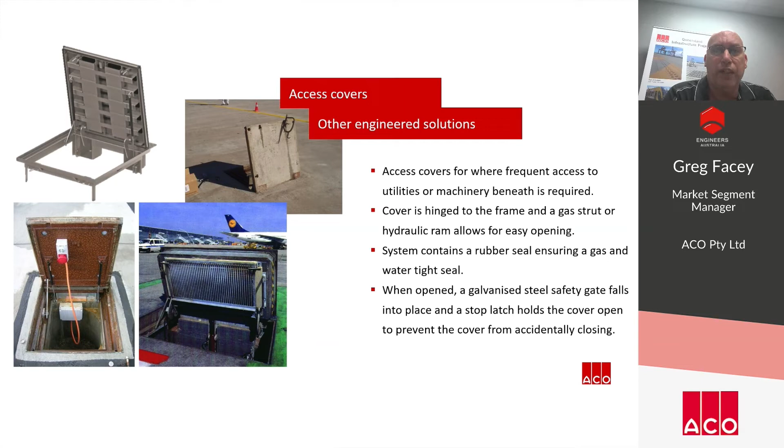So a large, heavy-duty enclosure was required. And there are also some other engineered solutions in the way of access covers where frequent access to utilities or machinery beneath is required, and these covers are hinged to the frame with a gas strut or a hydraulic ram which allow for easy opening, and the system contains a rubber seal ensuring a gas and watertight seal. And when open, a galvanised steel safety gate falls into place, and a stop latch holds the cover open to prevent the cover from accidentally closing.